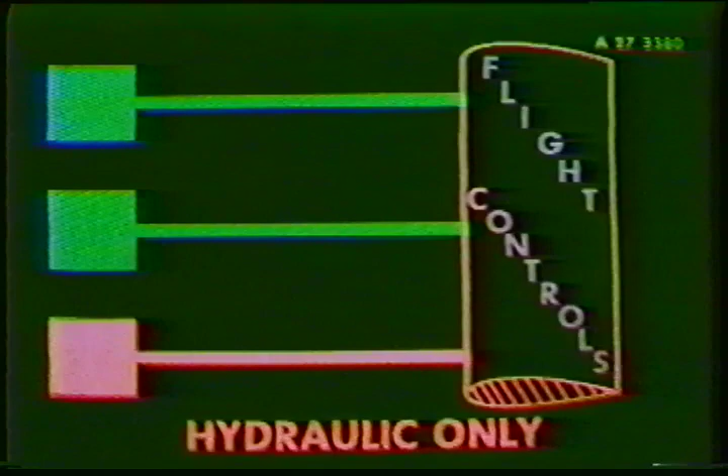The primary controls for roll are 2 all-speed ailerons, 2 low-speed ailerons, and 6 roll spoilers. For yaw control, a single rudder surface; 2 elevator surfaces and a trimmable horizontal stabilizer are provided for pitch control.

There are high lift devices on each wing. They consist of 2 trailing edge flap sections, 1 Kruger flap, and a notch flap at the wing root. Furthermore, to improve the aerodynamic characteristics, the all-speed ailerons deflect downwards when the flaps are moved to 8 degrees.

The lift dumping devices on the upper surface of each wing consist of 2 inner speed brake panels and 2 outer speed brake panels. In flight, these same panels are used together as speed brakes. On the ground, the speed brakes and the roll spoilers are used simultaneously as ground spoilers.

The flight controls are hydraulically actuated using the 3 hydraulic systems, blue, green, and yellow. They are completely independent, so that the loss of one hydraulic system does not affect the other 2, nor the safety of the flight.

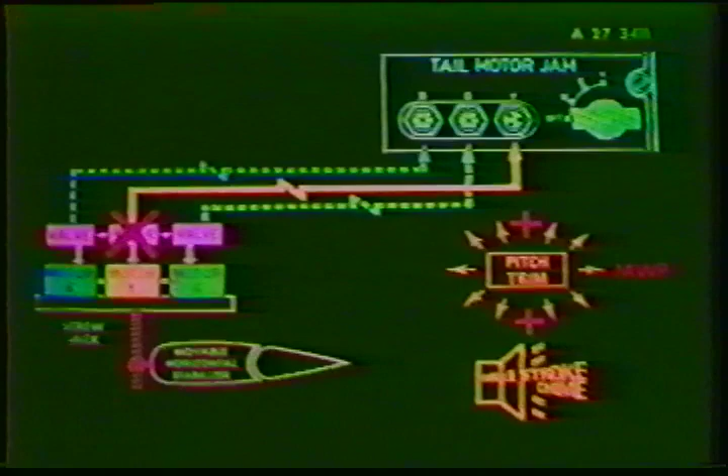The horizontal stabilizer is actuated by 3 hydraulic motors which operate simultaneously. Each motor is supplied by a different hydraulic system. The pilot valve of each hydraulic motor is fitted with a jam detector.

Flap actuation is achieved by a motor block that incorporates 2 hydraulic motors which operate simultaneously. Each of them is supplied by a different system. Slat actuation is achieved by a motor block of the same type as the flaps. The flaps and slats on each wing are fitted with asymmetry detectors.

The slat and flap motors are supplied from each system through a priority valve. This valve cuts off their supply when the corresponding system pressure drops below 1885 psi. This maintains the primary flight control supply.

In addition to the slats, the A300 is fitted with Kruger flaps and notch flaps. Each of these flaps is operated by a single actuator. The slat and flap motors, as well as the Kruger and notch flap actuators, are supplied through a priority valve. This valve, like the slats and flaps, cuts off their supply when the corresponding system pressure drops below 1885 psi. This maintains the primary control supply.

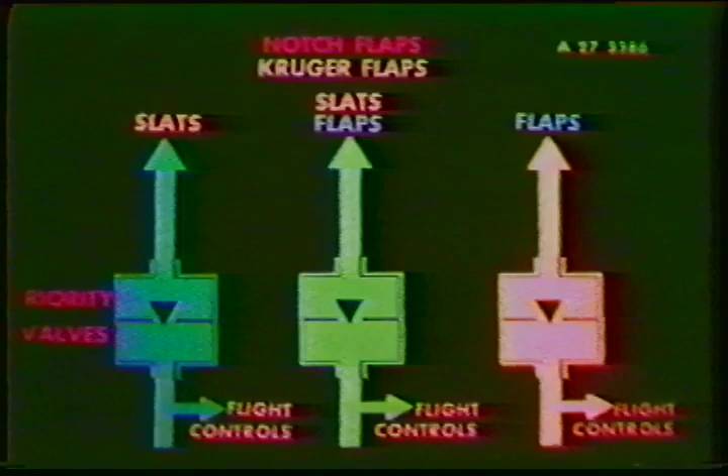An electro valve permits hydraulic fluid under pressure to flow to the primary controls and speed brakes. This valve is open when the solenoid is not electrically supplied. Each one of these electro valves is controlled by means of a selector on the servo control panel, located on the center overhead panel.

When the selector is positioned to on, the corresponding electro valve solenoid is de-energized and the valve is opened. With the selector off, the electro valve solenoid closes the valve. The test position is used by maintenance personnel only, and this is important, only on the ground.

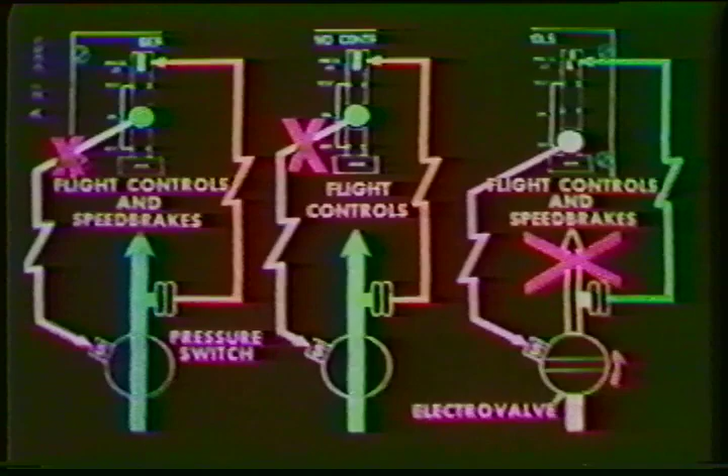The test function is not inhibited in flight. When the selector is set to this position, it has the same result as if it were set to off. The associated electro solenoid would be powered and closes. A mechanical lock makes it impossible to set more than 1 of these selectors out of the on position at the same time.

There is a pressure low magnetic indicator that displays the pressure in each system downstream of the electro valve. This magnetic indicator has two positions. Inline indicates normal pressure, while amber indicates a pressure lower than 1450 psi.

In the event of an individual servo control valve jam in the ailerons, rudder, or elevator, the jam amber warning light comes on, and the servos light illuminates on the master warning panel, accompanied by a single-stroke chime.

The jam and servos warning lights go out when the selector related to the corresponding system is set to off. As we have already seen, the electro valve closes and the corresponding flight controls are not supplied by the respective hydraulic system. The pressure low magnetic indicator turns amber.

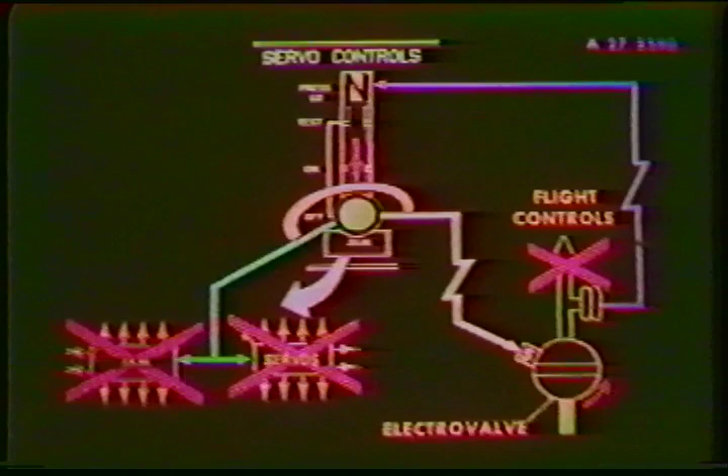Now let's go into the primary flight controls with a little more detail, starting with roll control. Roll control is provided by two identical coupled linkages and cable paths from the control wheel to the corresponding wing. The captain's yoke controls the left wing surfaces, and the first officer's yoke controls the right wing surfaces.

Under normal circumstances, the yokes are coupled by a spring strut, so both move simultaneously when either yoke is rolled. Rods and cables position a cable quadrant at the differential unit. The differential unit turns a shaft.

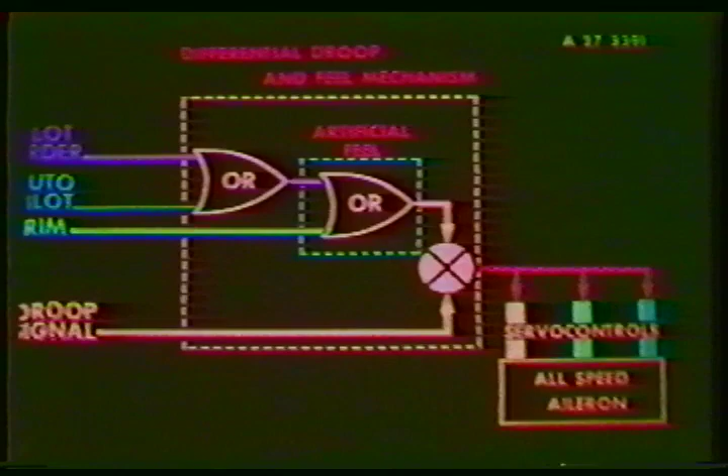Three servo valves are connected to a shaft and are each operated by a different hydraulic system. The shaft positions the valves to cause hydraulic pressure to move all-speed ailerons up or down. The differential unit also receives inputs from the pilot, autopilot, and trim control. Included in the differential unit is a spring assembly, which provides the artificial feel for roll control.

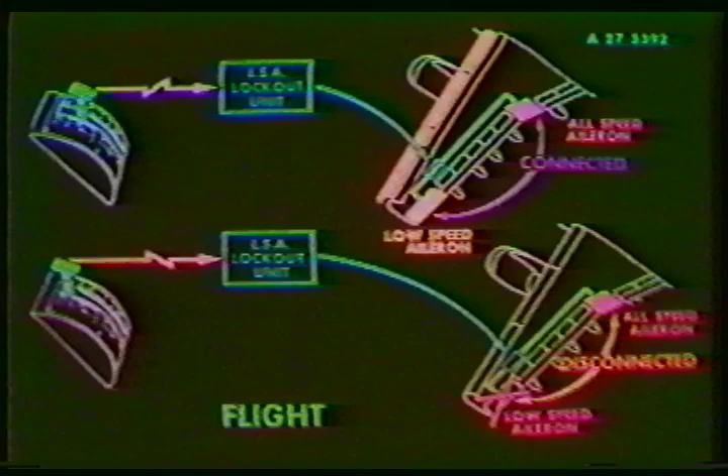When the aircraft is on the ground or in flight with the slat flap lever out of the retract position, the low-speed ailerons are connected to the all-speed ailerons by cables. So, if the all-speed ailerons are moving, then through an unlocking jack screw, the low-speed ailerons on each wing also move. When the slat flap lever is in the retract position and in flight, the jack screw, controlled by a computer, locks the low-speed ailerons to prevent that surface from moving.

Controls and indicators of the low-speed aileron connecting units are grouped on the low-speed ailerons panel located on the overhead. When the magnetic indicator shows inline, the low-speed ailerons are connected. When cross-line, they are disconnected. In the event of a discrepancy between one or both connecting units and/or the slat flap control lever position, the low-speed aileron light will illuminate. It is accompanied by a configuration light on the master warning panel and a continuous horn.

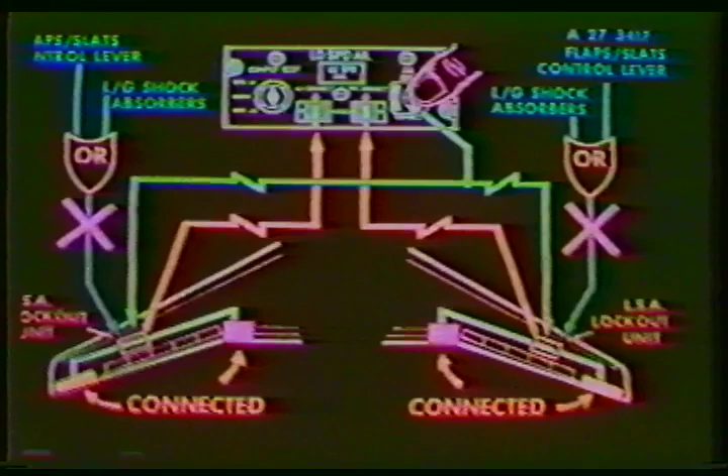A switch, which is held in its auto position by a guard, can be used to override the automatic controls to either disconnect or connect the low-speed ailerons by the use of a jack screw. The computer test is for ground test only. To increase the aerodynamic efficiency of the wing at low speeds, a droop signal from the flap position causes the all-speed aileron to deflect to a maximum of 10 degrees down. This occurs when the flaps are moved to 8 degrees.

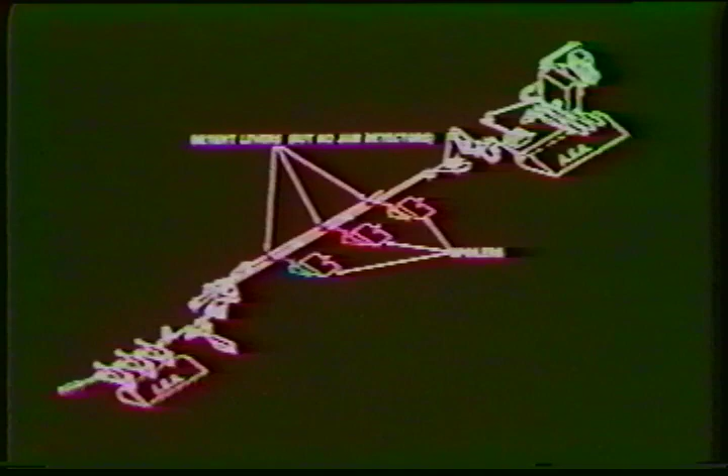The all-speed aileron linkage controls the position of the roll spoilers as well as the low-speed aileron. A full-stroke unit provides the transmission of the commands from the all-speed ailerons to the low-speed ailerons and roll spoilers. However, when the flaps are down, this same unit prevents the droop signal for the all-speed aileron from being transmitted to the low-speed ailerons. Spring units bring the spoilers or low-speed ailerons back to a neutral position in case of a failure of the control linkage.

Each of the three roll spoilers is actuated by a single hydraulic system, yellow, green, or blue. Normally, the servos work simultaneously as a function of the commands coming from the all-speed ailerons or the ground spoiler control. The roll spoilers are actuated as soon as the all-speed aileron deflection angle exceeds 5 degrees. There are no jam detectors associated with the roll spoilers. Therefore, no jam warning lights illuminate with this malfunction.

The roll spoilers' position is shown on the surface position scales of the flight control position indicator. The reading corresponds only to the outer and middle spoilers. The all-speed aileron position is directly read. The low-speed aileron position may be read on the same scale by depressing the low-speed aileron push button. A blue low-speed light comes on, indicating that the scale is showing low-speed ailerons.

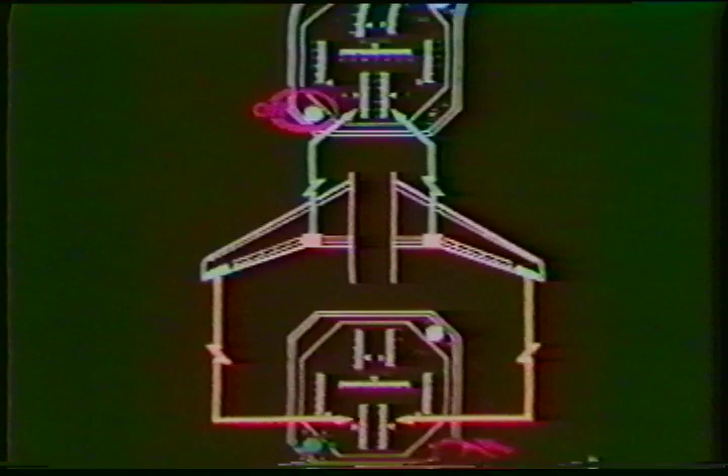We'll now discuss the roll jam. First, if an individual servo package jams, say on the all-speed aileron, the other two units will cause the ailerons to move. The movement causes a microswitch to complete the circuit in the malfunctioning unit and illuminates a jam light in the cockpit, along with a single-stroke chime, and a servo light on the master warning panel illuminates.

If a jam occurs in the first officer's cable path, his yoke and cables will not move. Therefore, only the control surfaces on the left wing will move. The captain will need to apply a 34 to 90-pound force to override this jam. It's reasonable to assume there will be a reduction in the aircraft's roll rate response. If the autopilot were connected, this jam would cause an autopilot disconnect.

On the other hand, if the jam were located in the captain's control path, the first officer will have to exert enough force, 34 to 90-pound force, to override the jam. Again, the roll response would be reduced because the right wing's control surfaces are the only ones moving. The autopilot would disconnect with this jam.

The autopilot is attached to the left aileron differential unit. The autopilot, when connected, flies the controls on the left wing through the differential unit. The right wing control surfaces move through the spring strut located between the yokes. As both yokes move, all appropriate controls move on both wings.

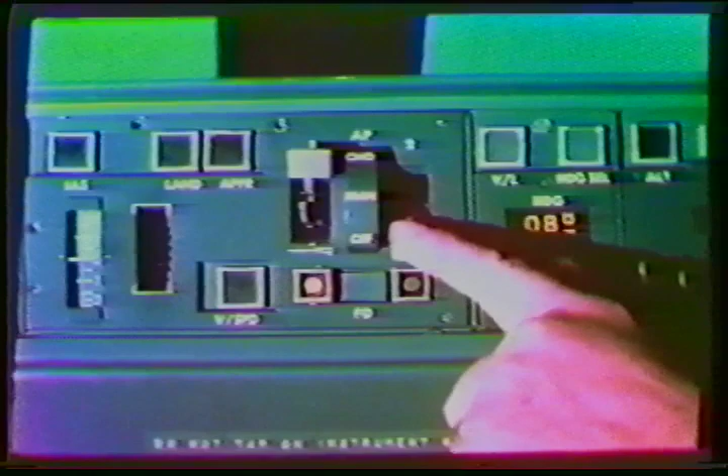When the autopilot is engaged, two control wheel steering sensors allow changes of roll attitude by action on a control wheel, known as control wheel steering function.

The discussion continues with pitch control. Pitch control consists of two control channels running along each side of the fuselage. They are connected to the control columns by a forward override mechanism. They are also connected to the elevator system by an aft override mechanism and a solenoid locking device.

When the yoke is moved back and forth, the inputs from the rods and cables to the cable quadrant and linkages to the individual actuators position valves to port hydraulic fluid from the hydraulic systems under pressure to move the elevator.

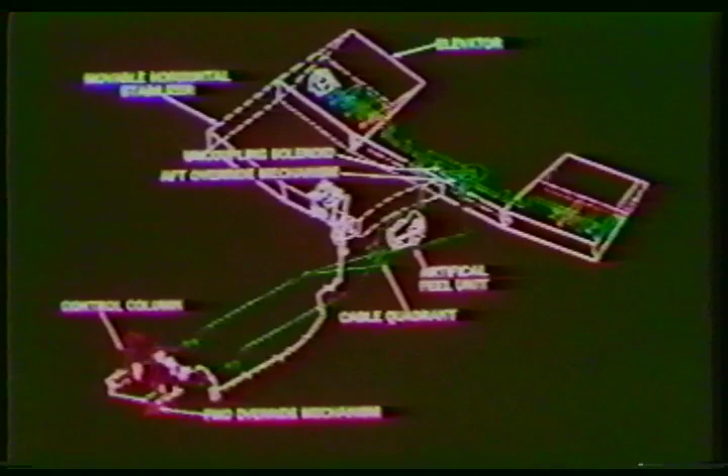Under normal operating condition, the coupling solenoid is uncoupled below 195 knots. The elevators, of course, move together because both cable quadrants are moving. At 195 knots or more, the solenoid locking device is engaged, and when one elevator moves, the other one moves also. This occurs because of the linkage between them.

Now, if a cable path jam occurs between the yoke and the cable quadrant, the particular path will not move. However, the free yoke will move and position the cable quadrant to move the elevator. This requires a 112-pound force to override the jam system. With a single-channel operation, it is not possible to get full elevator travel. However, surface movement is more than adequate for pitch control. The autopilot will disconnect with either a captain's or a first officer's control path jam.

Now, let's talk about an individual elevator jam. If the right elevator were jammed below 195 knots, the solenoid locking device is uncoupled, permitting the unjammed side to control pitch with either one or both columns. A force of 112 pounds is required to override this aft jam. The autopilot will disconnect with this jam.

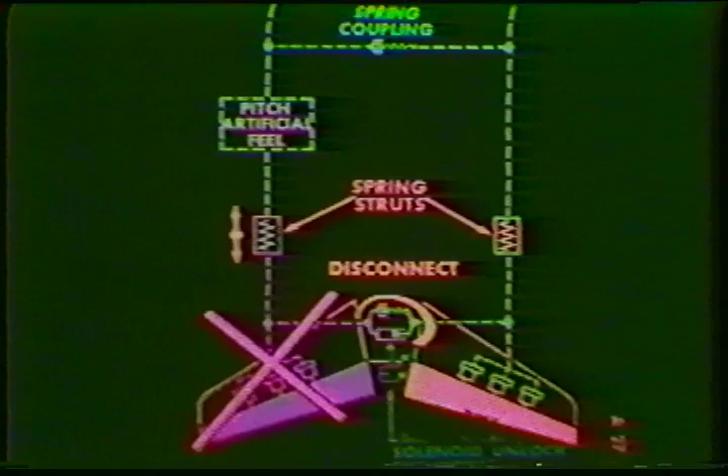Above 195 knots, the solenoid locking device is engaged and the good elevator is coupled to the jammed one. In this case, the columns will move against spring struts, but the elevator will not move. Pitch control is only accomplished with the stabilizer trim. The autopilot will disengage with this jam.

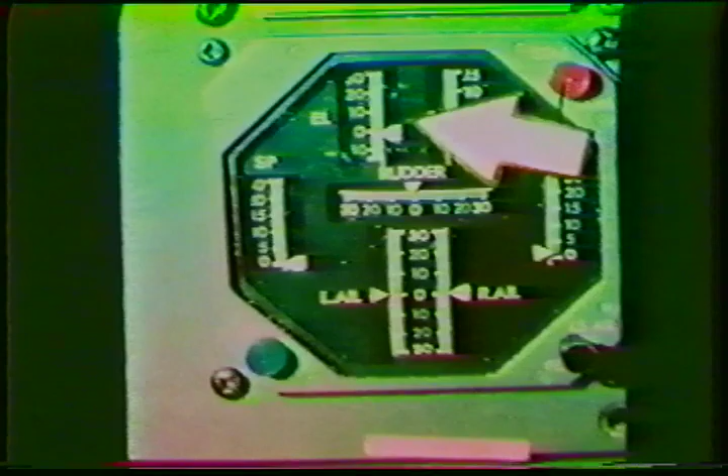Each elevator surface is actuated by 3 servo controls from 3 hydraulic systems: yellow, green, and blue. The servo controls are fitted with jam detectors, similar to the ailerons, which will illuminate the jam light on the servo control panel, accompanied by a single-stroke chime. The elevator surface position is shown on the EL scale of the flight control position indicator. This position information is only picked off from the right elevator surface.

Artificial feel units, known as pitch feel 1 and pitch feel 2, work in parallel to adjust the elevator forces according to speed and stabilizer position. The pitch feel 1 system receives speed information from ADC 1, and its feel actuator is supplied by the green hydraulic system. The pitch feel 2 system receives speed information from ADC 2, and its feel actuator is supplied by the yellow hydraulic system.

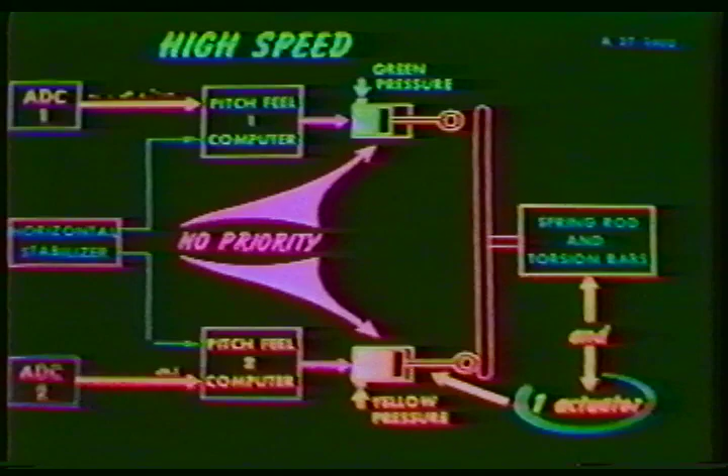Below 195 knots, the actuators are retracted and the artificial feel is only achieved by spring tension. Above 195 knots, the feel is provided by the actuator according to speed and stabilizer position. Pitch feel systems 1 and 2 work simultaneously, or independently if one system becomes inoperative. In the case of loss of both systems, both actuators are brought back to the low-speed configuration corresponding to below 195 knots.

Artificial feel controls and indicators are located on the pitch feel section of the overhead panel. Selection of each system is by a 2-position switch. With the selector positioned to on, the system is engaged. In off reset, the system is disengaged. A pitch feel amber warning light illuminates if there is a system 1 or 2 failure. This is accompanied by a pitch feel light on the master warning panel and a single-stroke chime.

An autopilot servo motor located in the stabilizer's right-hand side actuates the elevator control system. This servo motor has 2 actuators, one supplied by the green system and one by the yellow. When the autopilot is engaged, 2 control wheel steering sensors allow the pilot to change the pitch attitude by moving the control column. This is called control wheel steering or autopilot override. A detent unit allows the pilot to override the autopilot and limit the autopilot's authority in case of a runaway.

Now we'll discuss the stabilizer control. Trimming in the pitch axis is achieved by displacement of the trimmable horizontal stabilizer to bring it permanently in line with the elevator. The stabilizer is actuated by 3 hydraulic motors. These motors operate a single jack screw linked to the stabilizer.

The hydraulic motors may be controlled either mechanically or electrically. The mechanical control is achieved by the trim wheels via cable linkages which move the 3 hydraulic motors' pilot valves. The electrical control is achieved by 2 identical systems, pitch trim 1 and pitch trim 2. A trim computer for each system sends the signals to an electrical motor. The electrical motor actuates the hydraulic motor's pilot valve's control through a torque limiter.

Engagement of each pitch trim system is achieved by means of the corresponding lever on the pitch trim panel. The lever is magnetically held in the 1 or 2 position. The corresponding system is engaged if the corresponding AC bus and the DC essential bus for pitch trim 1 or the DC normal bus for pitch trim 2 are supplied. It is also necessary that the corresponding ADC is available and the monitoring system of the corresponding computer is operative.

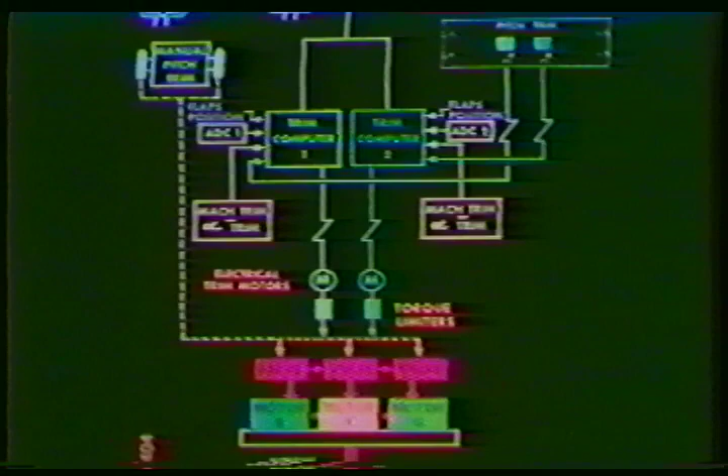The pitch trim computers receive flap position information. This information is used to vary the rate of trim speed. When both pitch trim systems are engaged, pitch trim 1 has priority and pitch trim 2 is in a standby and synchronized condition.

There are two trimming modes, the electric trim and the auto trim. The electrical trim is used when the autopilot is not engaged. This moves the horizontal stabilizer setting by the action of the trim rocking levers located on the control wheels.

The auto trim mode is achieved when the autopilot is engaged. The control wheel rocking levers are then inhibited for trim. The trim computers receive electrical signals from the autopilot. They control the horizontal stabilizer displacement until it is in line with the elevator. Thus, there is no jerk when the autopilot is disengaged.

As soon as a pitch trim is engaged, and depending on the mode used, that is electric trim or auto trim, the trim system also provides Mach trim and alpha trim functions. Mach trim system is provided to vary the stabilizer setting to maintain aircraft stability. As the center of lift moves aft on the wing, tuck under starts to occur. The Mach trim computer compensates for this by trimming the stabilizer to as much as 1 degree 26 seconds aircraft nose up.

Alpha trim protects the aircraft against flight effects at high angles of attack, high Mach number, and high altitudes. If the aircraft is banked sharply at high altitudes and speeds, the aircraft will tend to pitch up. Trim computers will sense this from information processed by the air data computer, Mach number, and trim. Trim input can be to a maximum of 1 degree aircraft nose down as required.

We have already seen that with both trim systems engaged, the pitch trim 1 has priority and ensures the horizontal stabilizer displacement. Any detection failure triggers pitch trim 1 disengagement and pitch trim 2 takes over. Any failure of one or both systems is indicated by illumination of the pitch trim light on the master warning panel, accompanied by a single stroke chime and normally by the corresponding pitch trim lever dropping to the off position.

All electric trim modes may be overridden by action on the trim wheels. Above a certain threshold, torque limiters send a signal to the computers, leading to both systems disengagement. Both systems may also be disengaged by setting both pitch trim levers to off.

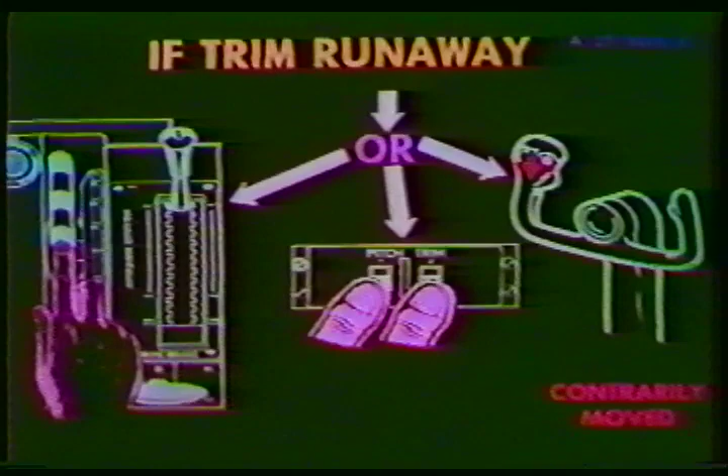The position of the stabilizer is shown on the flight control position indicator. On the ground, if the horizontal stabilizer is not in the takeoff configuration, the stabilizer trim warning light illuminates on the flight control position indicator. If takeoff N1 is simulated, that's by pushing the takeoff configuration button, or throttles are moved above 97% N1, the config warning light illuminates on the master warning panel and the intermittent horn sounds.

In the event one hydraulic motor pilot valve jams, the corresponding magnetic annunciator turns white on the test and monitoring panel. At the same time, the pitch trim light illuminates on the master warning panel and a single stroke chime sounds. The stabilizer trim rate is reduced.

The yaw axes will be discussed now. The two sets of rudder pedals in the cockpit are connected together. A single cable path runs along the fuselage to mechanically connect the pedals to the 3 servo controls through a mechanical bell crank and a variable lever arm unit. The rudder position is shown on the flight control position indicator.

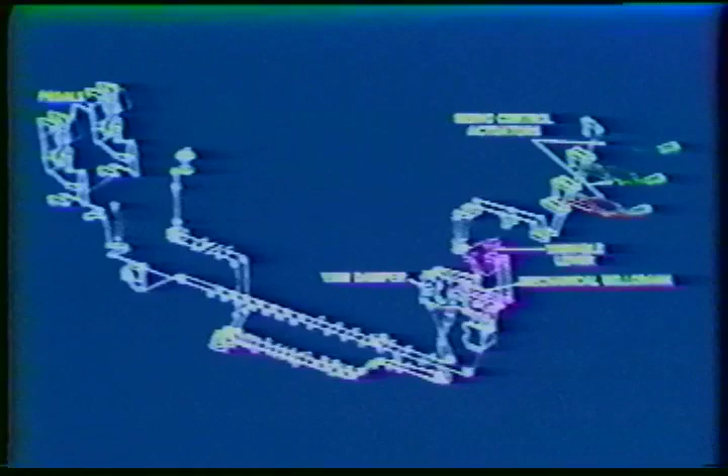The variable lever arm unit is a hydromechanical assembly. Its purpose is to progressively reduce the rudder travel according to the speed. For a given rudder pedal's displacement, the maximum rudder travel, which is 30 degrees up to 165 knots, is progressively reduced to a maximum of 5 degrees at 405 knots.

The variable lever arm positions 3 servo actuators to cause hydraulic fluid under pressure to move the rudder. These servos are fitted with jam detectors similar to the ailerons and elevators. In this event, a jam light illuminates on the servo's control panel located on the overhead, and a single-stroke chime sounds. The servo's light on the master warning panel also illuminates.

The rudder travel system includes two identical and independent systems operating in parallel, rudder travel 1 and rudder travel 2. Each system includes a hydraulic actuator which modifies the variable lever arm movement. Each actuator is slaved in position by one computer which receives speed information from the corresponding ADC.

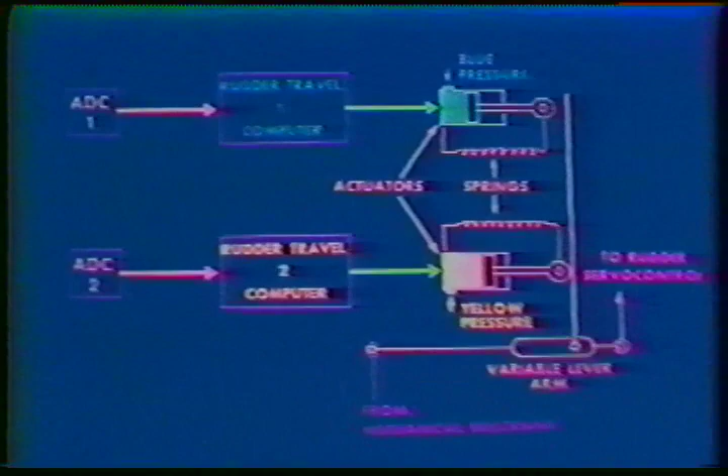The rudder travel 1 actuator is supplied by the blue system. It is slaved in position according to speed information from ADC 1. The rudder travel 2 actuator is supplied by the yellow system. It is slaved in position according to speed information from ADC 2. These actuators are supplied through electro valves which are controlled by the selectors on the servo controls panel.

At speeds below 165 knots, the actuators are shortened. The variable lever arm movement is not modified, so the rudder travel is not reduced. At speeds above 165 knots, the actuator lengthening is modulated according to the speed. The variable lever arm movement is modified by displacing the hinge point. So for a given rudder pedal's displacement, the rudder travel is reduced.

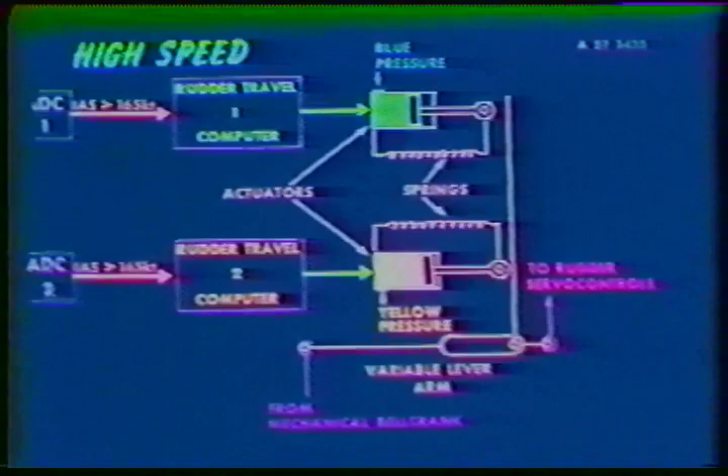When the rudder travel systems 1 and 2 are engaged, neither system has priority. Both actuators work simultaneously, but only the system which has the greater length assumes the function. The other actuator is synchronized. In the event of failure of one or both systems, the corresponding actuator is brought back to low-speed configuration by a spring strut.

Each system engagement is achieved by a two-position switch on the rudder travel panel. With the switch positioned to on, the system is engaged. At off reset, it is disengaged. An amber rudder travel warning light illuminates for all detected failures within the corresponding system. It is accompanied by the illumination of a rudder travel light on the master warning panel and by a single-stroke chime. The rudder travel warning light can also be used to test the corresponding system.

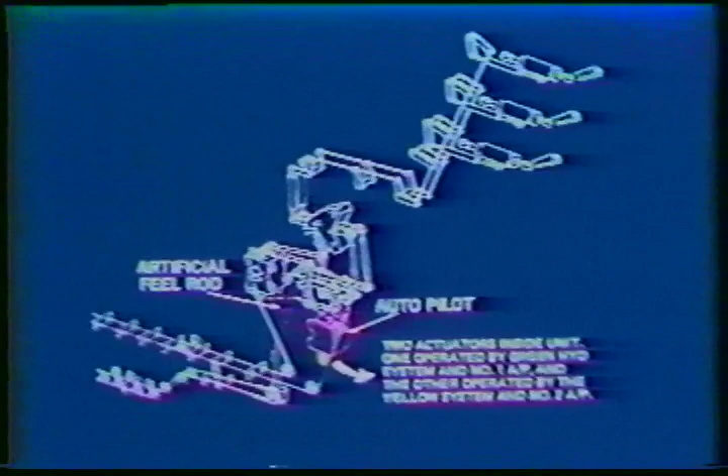Trim control is mechanically achieved by direct action on the artificial feel, which consists of a spring strut. Thus, artificial feel is independent of the speed. The autopilot servo motor fitted downstream of the artificial feel is linked to the mechanical bell crank via a clutch system, allowing manual override. The servo motor includes two hydraulic actuators, one for each autopilot. One of the actuators is supplied by the green system and the other by the yellow system through electro valves controlled by the selectors on the servo control panel.

A yaw damper servo motor is also linked to the mechanical bell crank. The yaw damper system provides lateral oscillations dampening and turn coordination in manual flight with the flaps extended, and a beginning of automatic rudder kick in case of an engine failure in automatic flight with the flaps extended. This is covered in the AFCS section.

The servo motor includes two hydraulic actuators, each one operated by a different system. The yaw damper 1 actuator is supplied by the blue system and yaw damper 2 by the yellow system. The actuators are also supplied through the electro valves controlled by the selectors on the servo control panel. The engagement of each system is achieved by means of the corresponding lever on the yaw damper panel.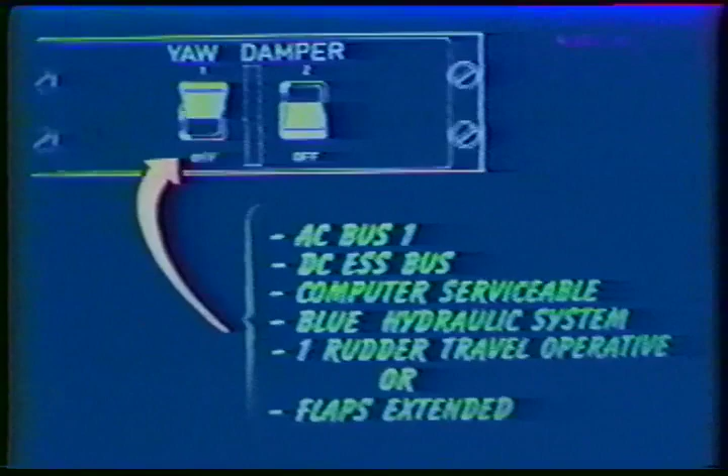The lever is mechanically held in the 1 or 2 position, and the corresponding system engagement is possible if the AC bus 1 and DC essential buses are supplied for yaw damper 1, and AC bus 2 and DC normal buses are supplied for yaw damper 2. The corresponding computer must be serviceable. The hydraulic supply is available, and one rudder travel system is operating.

When both yaw damper systems are engaged, yaw damper 1 has priority and yaw damper 2 is synchronized. Failure of one or both systems is signaled by the corresponding lever dropping to off and the illumination of a yaw damper light on the master warning panel, accompanied by a single-stroke chime.

3 additional notes should be brought to your attention. One, rudder trim and autopilot inputs will move the rudder pedals. Two, yaw damper does not move the pedals. And the third one, when stall warnings are energized, the yaw damper inputs to the rudder for turn coordination are inhibited. This completes the primary controls.

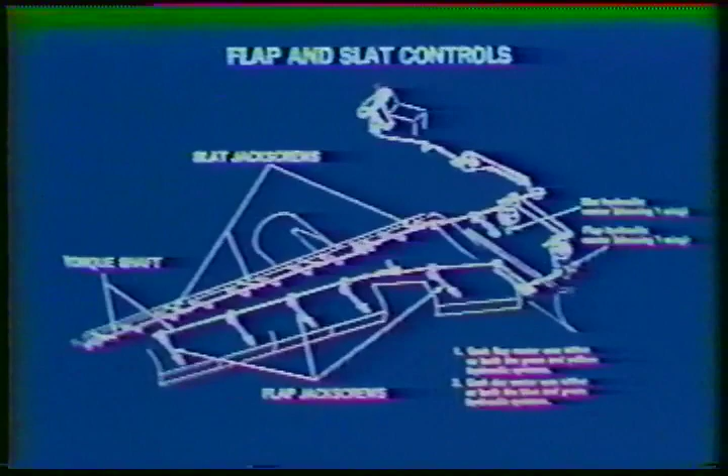The secondary controls consist of high lift devices and lift dumping devices or spoilers. When the slat flap handle is moved in the cockpit, through rods and cables, inputs are made to 4 hydraulic motors, 2 for the flaps and 2 for the slat extension and retraction. These hydraulic motors move the trailing edge or leading edge devices by the use of 2 jack screws in each wing.

The trailing edge flaps consist of 3 sections per wing. They are the double slotted type and move rearwards. Each flap section is driven by 2 jack screws and moves along 2 tracks.

An actuating unit consisting of 2 hydraulic motors interconnected by a differential gear operates the flaps through a torque shaft assembly and jack screws. Each torque shaft assembly also drives an aileron droop signal unit. This unit allows the all-speed ailerons to deflect 10 degrees down when the flaps are extended.

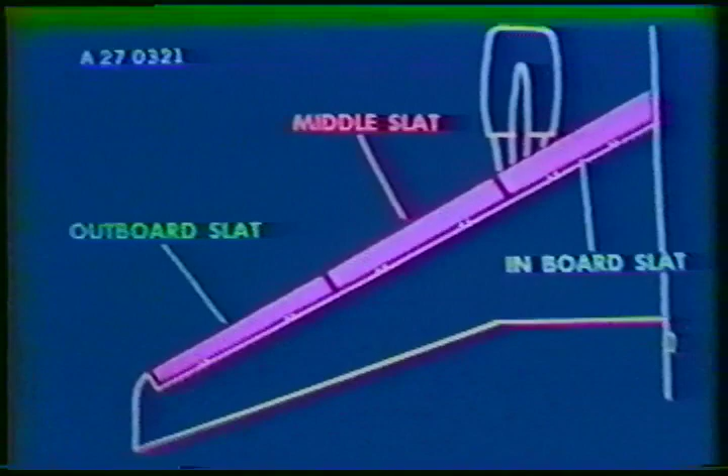The leading edge slats, 3 sections per wing, move forward to reach their extended position. Like the flaps, for each wing, the 2 hydraulic motors interconnected by differential gear drive the slats through a torque shaft assembly and a jack screw.

A Kruger flap and a notch flap are provided on each wing to improve the efficiency of the slats. They can be in 2 positions only, retracted or extended. Each of the Kruger and notch flaps is moved by a hydraulic actuator. These actuators are supplied through the green hydraulic system, through the same hydromechanical selector controlled by the input mechanism of the slat motors.

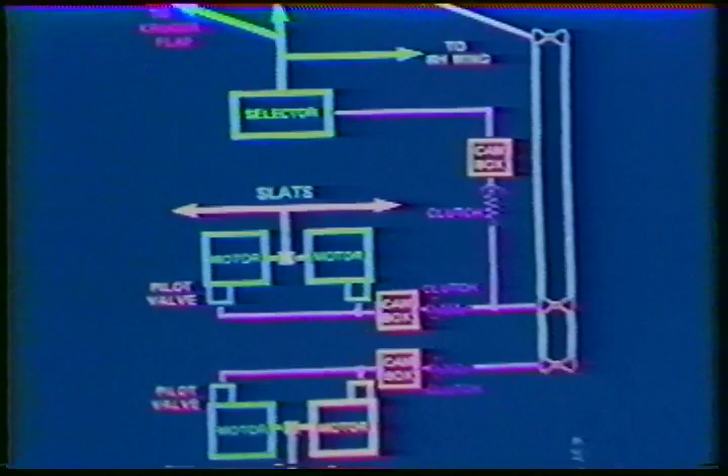The control system consists of a duplicated cable linkage which gives commands to the pilot valves of each motor and to the Kruger and notch flap control selector through a clutch. This selector is controlled upstream of the slat motor unit. For each actuating unit and the selector, a cam box is provided to comply with the requirements for the extension of the corresponding control surfaces.

Should a mechanical jamming occur between either the actuating unit and its clutch, the clutch disconnects and enables the opposite control surfaces to be used. Similarly, in the event of a jamming between the selector and its clutch, the slats and flaps will continue to operate. If the angle of attack exceeds 8.6 degrees, a solenoid will prevent the retraction of the slat handle beyond the 16-degree position until the angle of attack is reduced.

As already mentioned, the flaps and slats are driven by 2 hydraulic motors. The flap motors are supplied respectively by the green and yellow hydraulic systems, and the slat motors by the green and blue hydraulic systems. The 2 hydraulic motors are independent, but they drive a single output shaft through a differential gear. Each motor is fitted with a hydromechanical brake which operates in low pressure condition. In normal operation, it is kept released by a hydraulic power passing through 2 series-connected electro valves.

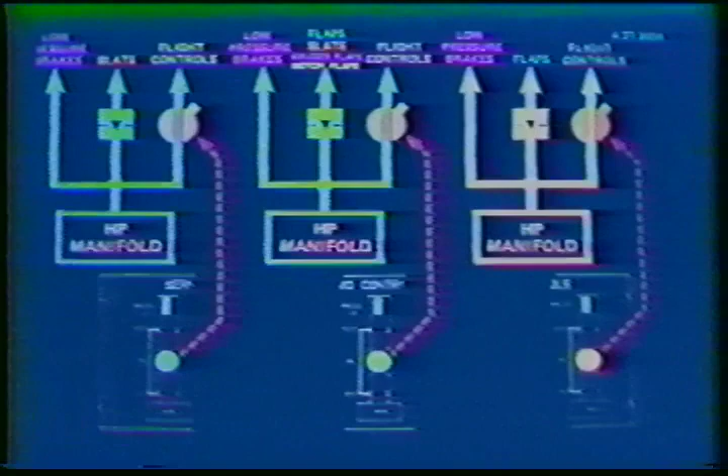The flap motors are supplied directly from the high-pressure manifold through priority valves. The supply to the low-pressure brake is upstream of these valves. Similarly, the slat motors are supplied directly from the high-pressure manifolds through the priority valves. The supply to the low-pressure brake is upstream of these valves. Notice that the hydraulic supply to the slat and flap motors and the low-pressure brakes is not through the electro valves controlled by the selectors on the servo control panel. The Kruger and notch flap actuators, which use the green hydraulic system only, are also supplied directly from the high-pressure manifold through a priority valve.

A jammed condition of a pilot valve in any slat or flap motor is indicated in the cockpit by a magnetic annunciator which turns white on the second officer's panel. At the same time, an electrical signal causes the closure of both electro valves of the brake of the corresponding motor. Cutting off the hydraulic supply puts the brakes on and locks the motor output. The movement is then provided by the other motor, but at a reduced rate.

The position of the slats and flaps and the Kruger and notch flap configuration are displayed on the slats and flaps position indicator. The orange index on the flap scale displays the actual position of the control lever. It also indicates the limit speeds. The positions of the control surfaces are shown by the white stripes which move on the flaps and slats scales.

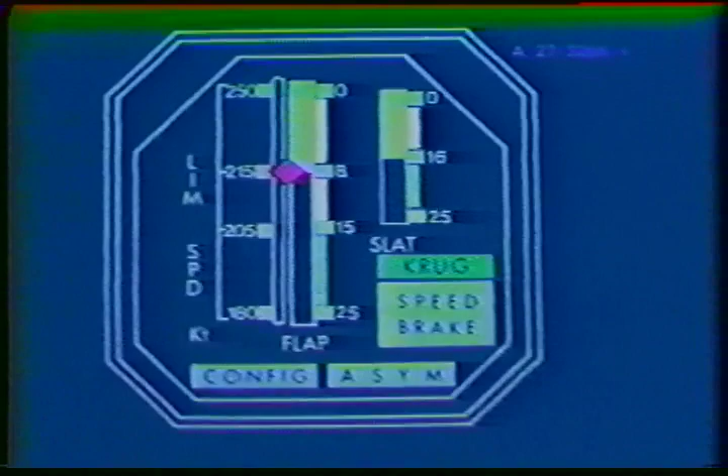A configuration light on the flight control position indicator illuminates on the ground only if the slats and flaps are not in a takeoff configuration. If takeoff thrust is used or simulated, for example, N1 greater than or equal to 97%, the configuration light illuminates on the master warning panel and an intermittent horn sounds.

A Kruger light on the flight control position indicator gives the configuration of the Kruger and notch flaps. It is extinguished when the four control surfaces are retracted. The blue light flashes while in transit for any or all four control surfaces. The blue light is on steady when four control surfaces have reached their fully extended position.

If 10 seconds after the movement signal, one or two Kruger and notch flaps are not in agreement with the position of the slat flap control lever, the Kruger light flashes continuously. The configuration light illuminates on the master warning panel, accompanied by a continuous horn. Note that in the event of a loss of the green system, these warnings will be activated at the slat extension.

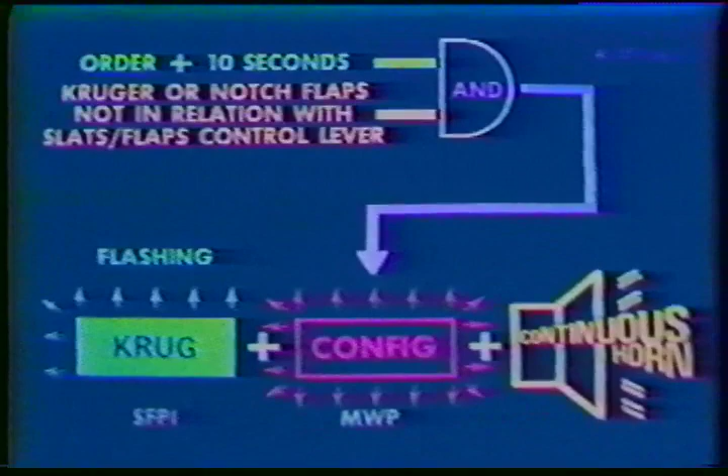Two independent asymmetry computers receive slats or flaps position information from the detectors installed at the end of each torque shaft assembly. These computers compare the position of each shaft end and then allow the detection of any asymmetrical movement of the left and right wing control surfaces. This occurs when a 1-degree difference is detected between the left and the right wing.

The computers cause the closure of both low-pressure brake electrovalves in each of the motors. The brakes lock the motor's output, which stops the control surfaces immediately. Only one monitoring channel is sufficient to provide this function.

When an asymmetry has been detected by at least one of the computers, and if both brakes have operated, the asymmetry light illuminates on the slat flap position indicator together with a configuration light on the master warning panel. A continuous horn sounds. The position of the involved control surface is indicated on the flight control position indicator.

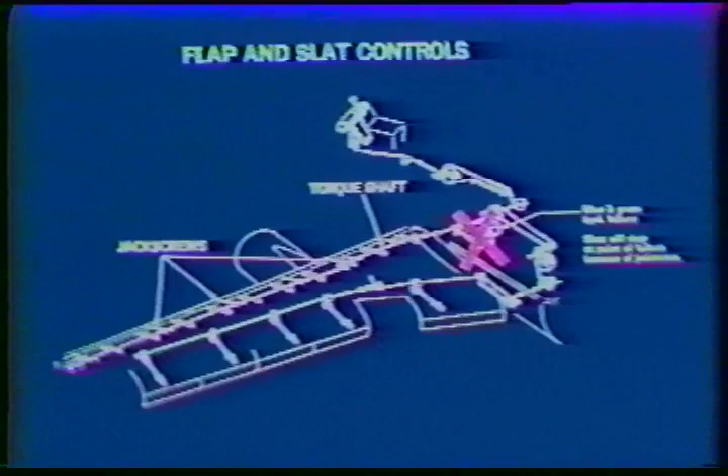Also, in the event of a complete hydraulic failure to the slats or flaps, for example, open lines, the flaps or slats will stop where the failure occurred. Either one stops because they extend and retract by a jack screw arrangement, and aerodynamic forces would not be able to override this jack screw.

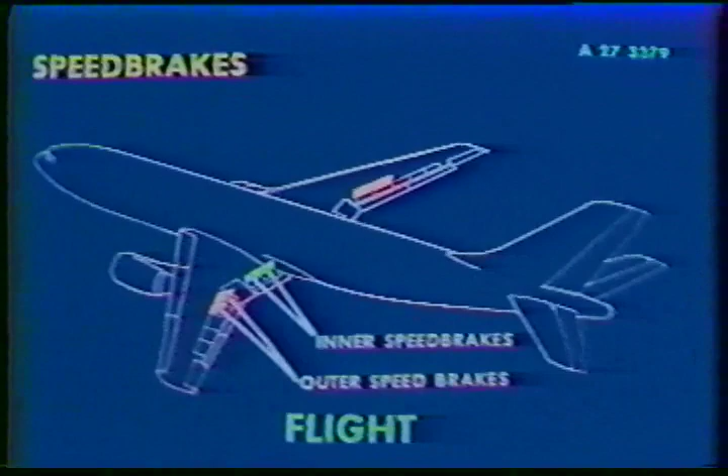Let's study the speed brakes and the ground spoilers now. Speed brakes are provided for in-flight, and ground spoilers are used on the ground. In each wing, the speed brake function is provided by two inner speed brakes and two outer speed brakes. The ground spoiler function is provided by four speed brakes plus three roll spoilers on each wing.

The speed brake handle, which is located on the center pedestal, is moved between the retract and full position to operate the speed brakes. A linkage transmits the movement of the handle to the pilot valves of the speed brake servo controls. Each speed brake is actuated by a single servo control as opposed to all the other control surfaces. The two servos for the four speed brake panels on each wing are supplied by the blue and the yellow hydraulic systems.

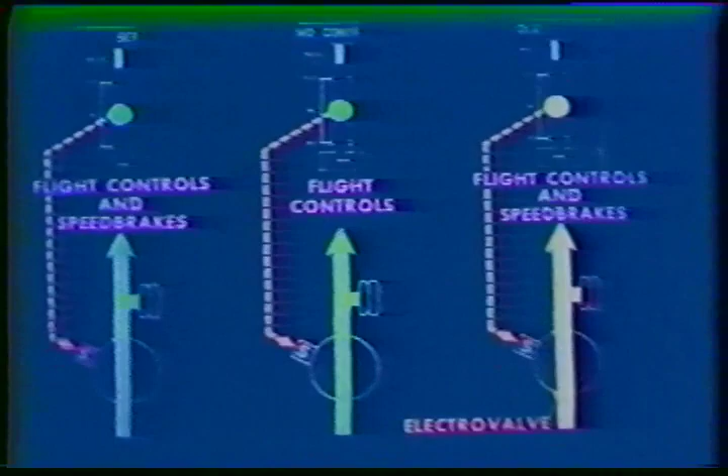The speed brake servo controls are supplied through electrovalves controlled by selectors on the servo control panel. Just a reminder that the speed brakes are not fitted with jam detectors. A speed brake light located on the flight control position indicator gives the speed brake configuration. It is off if the speed brakes are retracted. It illuminates amber as soon as the speed brakes are extended.

On the ground, if the speed brakes are extended and the takeoff thrust is applied or simulated, for example, N1 greater than or equal to 97%, the config light illuminates on the master warning panel accompanied by the intermittent horn. The maximum speed brake deflection angles in flight are 35 degrees for the outer speed brakes and 25 degrees for the inner speed brakes.

The ground spoiler function is next. The inner speed brakes extend to 50 degrees and the outer speed brakes extend to 35 degrees. The roll spoilers extend to 50 degrees. This occurs either at landing or in the event of an aborted takeoff.

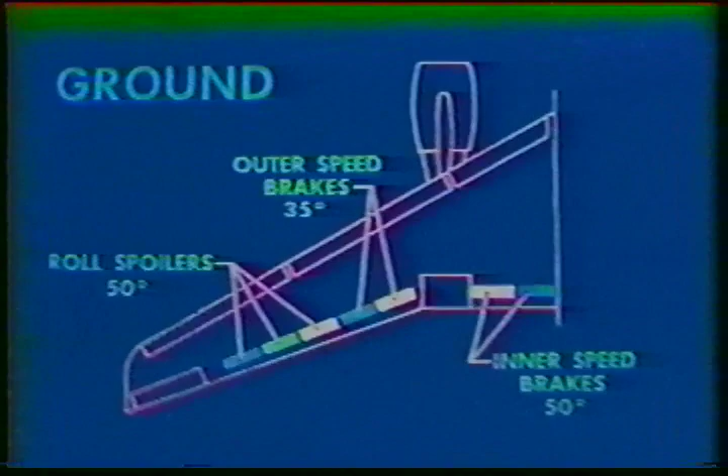Ground spoilers will extend automatically if the following conditions are satisfied: the function has been armed, both throttles are at idle, and the aircraft is in the ground configuration. Ground spoilers are normally armed by pulling the speed brake control lever upwards when at the retracted position. Arming is also accomplished when either reverse lever is unlocked.

The ground condition is achieved using the speed information coming from the tach generators on the rear, right, and left wheels of each main landing gear. The logic is such that the ground condition is achieved when landing if the speed of at least one wheel of either main landing gear is greater than 50 knots. If a takeoff is aborted beyond 50 knots and weight is still on the main gear, the spoilers will extend as reverse is applied.

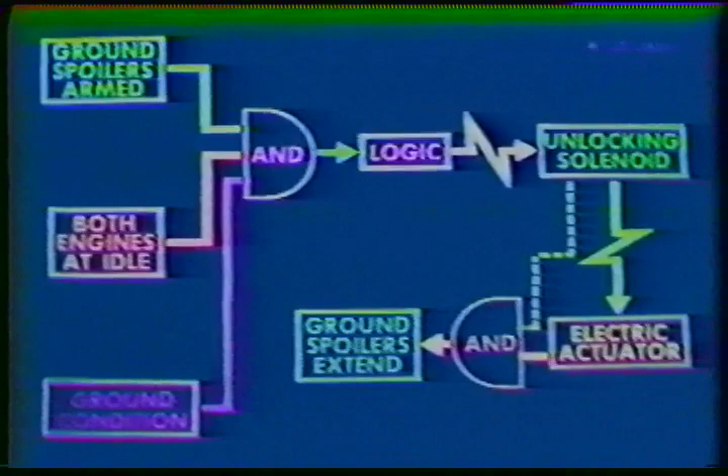The electronic logic supplies an unlocking solenoid and an electric actuator. The solenoid releases the control handle, and the handle is driven by the electric actuator to the extend position. The movement of the handle is transmitted to the mechanical linkage, causing the ground spoilers to extend. Extension of the ground spoilers is carried out in 2 phases. When the handle moves from retract to full, the normal extension of the speed brakes is controlled by the electric actuators. From full to ground spoiler, the complete travel of the linkage causes the opening of a hydromechanical selector.

This hydromechanical selector is supplied by the yellow hydraulic system and allows 2 actuators per wing, one for the speed brakes and one for the roll spoilers, to extend on the ground for full deployment of all 7 spoiler panels on each wing. These actuators cause the extension of the inner speed brakes from 25 to 50 degrees and the roll spoilers directly from 0 to 50 degrees.

Ground spoiler extension is indicated on the slat flap position indicator by the illumination of the speed brake light, and on the flight control position indicator by the indices on the spoiler scales. Please look at the diagram and note that the spoiler indication does not take into consideration the position of the inner roll spoiler, which uses the yellow hydraulic system. This completes the flight control presentation.

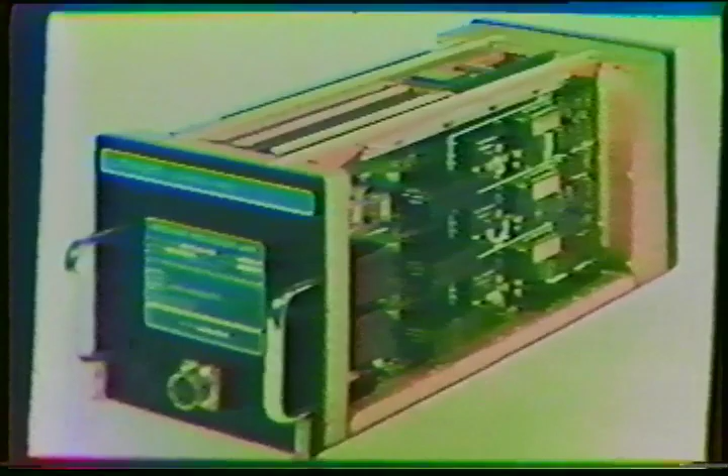This program is intended to review procedures relating to Omega system operations. Procedures such as initialization and waypoint entry will not be discussed since they are now routine. During system operation, certain malfunctions and/or failures may occur. The LTN-211's built-in test system monitors and tests approximately 10 functions. The probability of detecting a failure within the system is greater than 99%.

Whenever the display selector switch is set to DTK STS, the right numerical display indicates action malfunction codes and the status of the system. The status indication consists of a 2-digit coded number in the least significant digits. The red warn annunciator illuminates when an Omega navigation system failure has been detected by the integrity monitoring function. A steady warn annunciator indicates a hard ONS failure. When this condition occurs, attempt system reinitialization. If it fails again, report malfunction to maintenance.

The logbook write-up should include the following: the Z time at which the malfunction occurred; the stations being used, indicated when the CDU display selector is set to STA; the wind and true airspeed readouts from the CDU; the malfunction code, as discussed later in this program; and finally, a brief description of the problem.

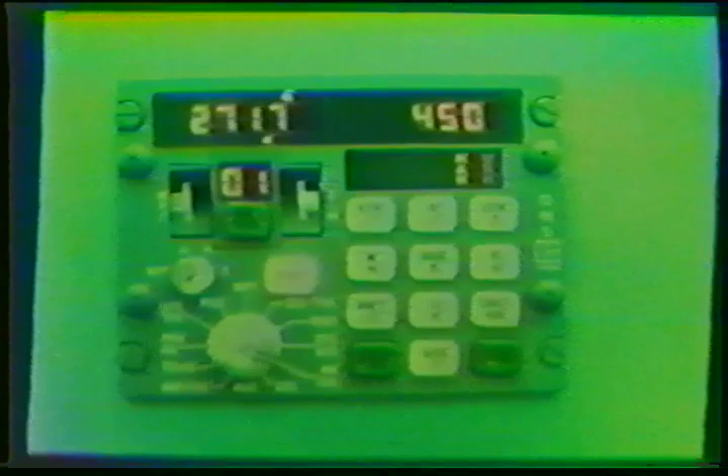When in the DR mode for an extended period of time, it may become necessary to manually update wind direction and/or velocity. The winds shown on the computerized flight plan may be used if, to this point, they were accurate. For a manual wind direction entry, set the display selector switch to wind, then press L. Then starting with the most significant digit, key in the direction and press ENT. For a manual velocity entry, press R. Then starting with the most significant digit, key in velocity and press ENT.

Note, wind entry requires the entry of both wind direction and wind speed. A manual entry of wind is only possible in the DR mode, and the system will automatically use the calculated value for wind when Omega navigation is resumed.

This aux function is used only in the DR mode to manually enter drift angle and ground speed. In flight, these parameters must be periodically updated to maintain accurate DR navigation. Here again, your computerized flight plan may be used as a data source. When Omega navigation is resumed, these values will be automatically updated based on received Omega data. Manual entry of drift angle and ground speed may be accomplished as follows.

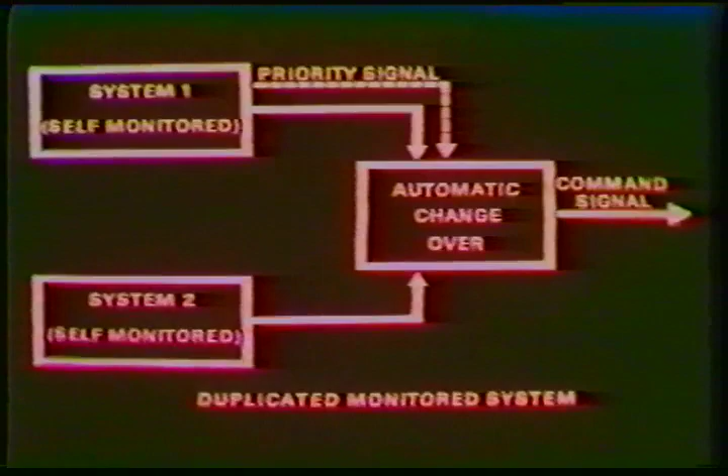The yaw damper uses 3 different input signals: the yaw gyro signal, the roll attitude signal, and the lateral accelerometers. The yaw rate signal controls the Dutch roll damping and damping of effects of turbulence mode. The roll attitude input controls the turn coordination mode.

With the autopilot engaged, the accelerometers counter the immediate effects of an engine failure. As a result, the lateral movement caused is detected and a continuous rudder correction is applied. In summary, the yaw damper operates in much the same manner on the A300 as on other aircraft Eastern operates. The yaw damper rudder deflection is limited to 10 degrees or less depending on aircraft speed.

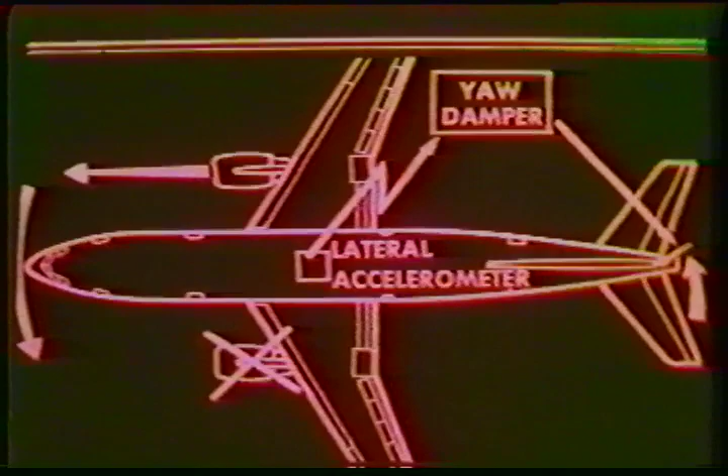Now, with the autopilot engaged and the flaps at 8 degrees or more, the accelerometers will provide short-term rudder deflection, while the long-term deflection for engine failure compensation is provided by the autopilot yaw channel and is limited only by the rudder travel system. The yaw damper engage switches are located on the overhead panel. There are 2 identical subsystems for redundancy in the event of one failing.

The pitch trim subsystem actuates the trimmable horizontal stabilizer. When the pilot activates the control wheel trim switches or rocker switches, he causes the electrical trim function to operate the horizontal stabilizer. With the autopilot engaged, the electrical trim function will automatically trim the horizontal stabilizer. This is a dual subsystem for redundancy.

The auto throttle subsystem moves the throttles in order to maintain the airspeed selected on the counter. The indices or bug in both airspeed indicators will also point to the same speed. The auto throttle system moves the throttle levers to acquire the selected speed. Its second purpose is the holding of selected N1 displayed on the N1 computer.

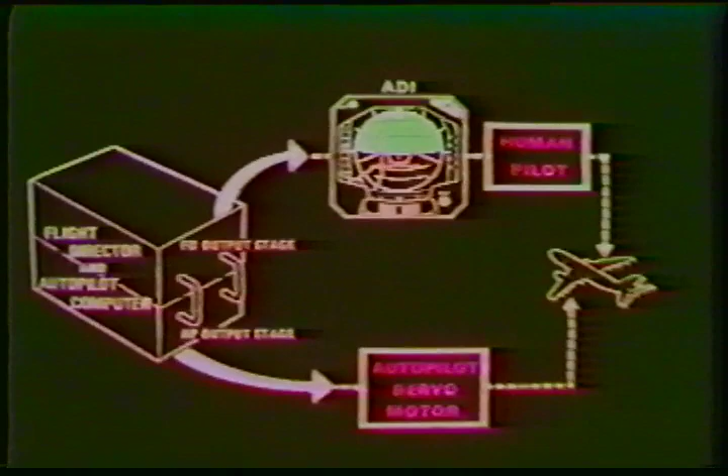The autopilot flight director subsystems use a common computer and employ the same electronic computation. The autopilot flight director is controlled from a common panel, and most of the time they operate in the same modes. We will therefore assume that the autopilot simply obeys the flight director commands as a human pilot responds to flight director command indications.

The Failure Performance Indicator, or FPI, indicates the mode and function engagement configuration. From left to right, the indications concerning the auto throttle, then lateral autopilot flight director modes. The lower part displays the approach and automatic landing annunciators.

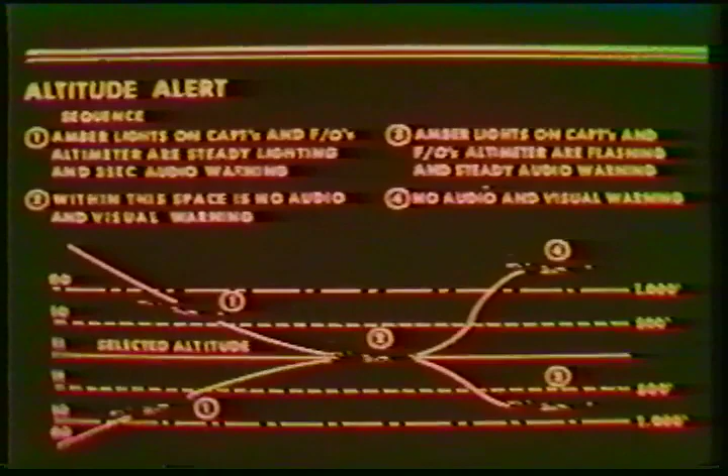The altitude alert system provides audio and visual warnings on approaching or leaving a pre-selected altitude. It operates independently of autopilot or flight director engagement modes. The system is operative when the landing gear is retracted or when the aircraft is on the ground.

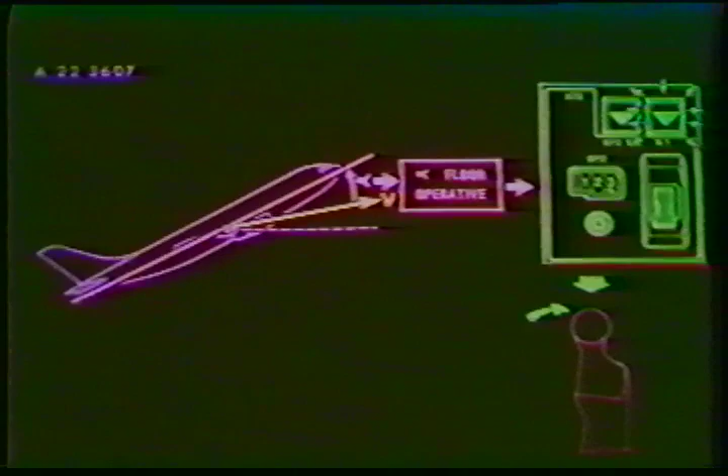The Speed Reference System, or SRS, provides two functions: the speed acquisition and maintaining function, and the alpha floor function, which protects the aircraft at high angles of attack. The SRS speed acquisition and holding function is used for takeoff and for manual overshoot. It is engaged by pulling up on one or both go levers under the throttle levers.

The SRS light on the upper part of the failure performance indicator illuminates green and will remain on until the autopilot or flight director upper mode is engaged. The term upper mode refers to any input to the flight director or autopilot by the pilot using the push buttons on the AFCS control panel.

Speed acquisition and maintaining function is used to maintain the speed set on the speed counter on the autothrottle panel. The commands are displayed on the attitude director indicator pitch bars. These commands enable the pilot to acquire and hold the selected speed. An important point to remember is it is available when the autopilot and flight directors are not or are engaged and no upper mode is selected.

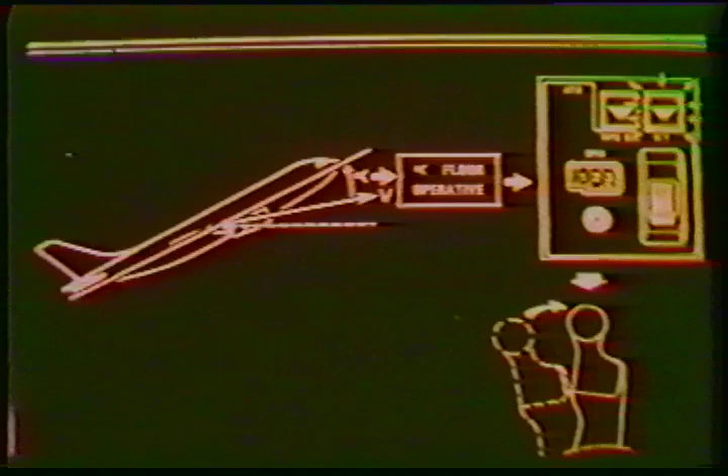The alpha floor function is automatically activated when the aircraft incurs a high angle of attack. The autothrottles will then move to the setting on the N1 computer. The operation of all the above subsystems requires AC and DC power supplies, the blue, green, and yellow hydraulic systems pressures, and the operating condition of the computers and associated systems.

The AFCS control panel is located on the glare shield above the pilot's forward and center instrument panels. Associated with the AFCS are two failure performance indicators, or FPIs. They display the various operative modes and conditions.

We will now study the action of the different controls and indicators, starting with the flight director. Flight director operation is controlled by depressing FD1 or FD2 push buttons. The selected flight director push button will illuminate. Only one flight director can be engaged at a time, except in approach or land modes.

When flight director 1 push button is pressed, the captain's flight director system is activated, and FD1 appears in his ADI. 1 also appears in the HSI. This means that NAV1 is supplied to the captain's complete flight director system. The figure 1 also appears in the first officer's ADI with the same selection.

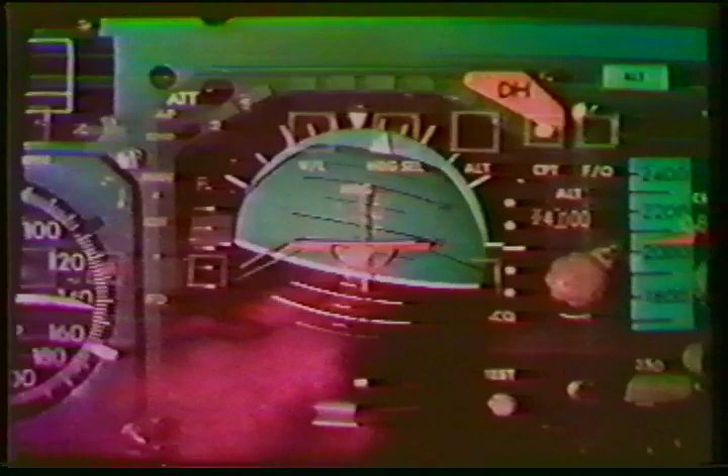The flight director roll bar will display commands to turn to the bug setting in the HSIs, which correspond to the settings on the counter. The bugs in both HSIs are set by this single counter located on the glare shield. The pilot flies the aircraft to satisfy the commands.

The roll bar will be centered when the required bank angle is achieved and will provide commands to roll out on the selected heading. The heading mode is similar to the heading mode in our other aircraft and is compatible with the pre-capture phases of the VOR, localizer, approach, and land modes.

With a VOR or localizer frequency selected on the associated nav receiver and a course selected in the course window, pressing the VL button will engage the VOR-LOC mode. When the course knob is moved, the split course arrow or course pointer in the respective HSI will move to the same figure that appears in the course window.

At VOR radial or localizer capture, VL amber changes to VL green and the heading select legend will disappear. The pilot follows the commands on the roll bar to capture the desired course once the appropriate angle of intercept has been established.

When used as an ILS, set the course arrow for the inbound front course heading, whether it is a front or back course approach that is to be flown. In this mode, an ILS approach to a runway that has no glide slope can be made with a glide slope flag in view. A reminder with respect to the course bar: it is directional. However, the roll bar in the ADI will display commands to turn to the course arrow head. Therefore, for a back course, the flight director switch should be turned off.

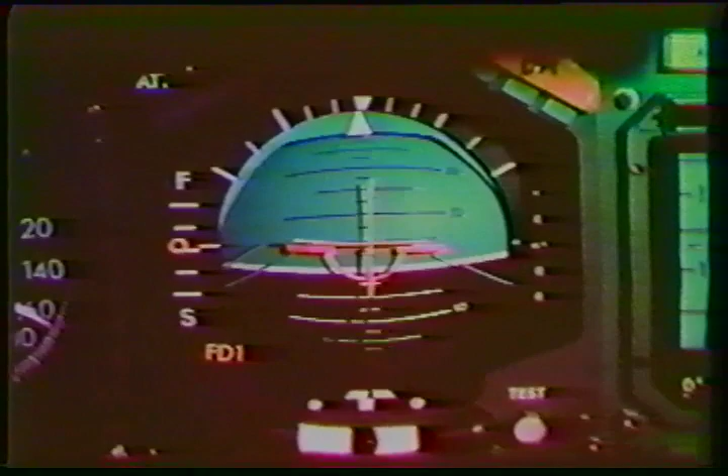The items discussed thus far, that is heading select, VOR loc, vertical speed, IAS, and approach modes, have been in relation to the flight director. The aircraft must be flown manually to satisfy the commands on the pitch and roll bars in order to achieve that which was selected. With the autopilot engaged in command, upper mode signals are now sent to the servos, and the autopilot flies these same selected commands. The pilot monitors the operation on the flight director and FPI.

The land mode is common to both pitch and roll axes. It is an autopilot command mode only and is used for auto landings. It is the only mode that allows engagement of both autopilots. The FPI will display Land 2 or Land 3 depending on whether one or two autopilots are engaged. This operation is described in the Category 3A slide tape program.

The altitude module provides control in two modes: the altitude hold mode and altitude acquire. When the altitude hold mode is engaged, the pitch bar provides commands to hold the barometric altitude at the time of engagement. In the flight director mode, the pilot must fly the aircraft to the pitch bar. The autopilot will hold the altitude when it is engaged. No counter setting is required for this mode.

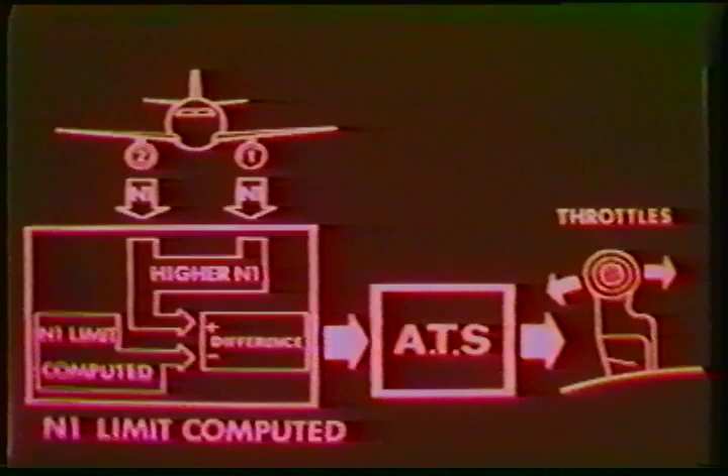When the autothrottle lever is moved to the magnetically held up position, the autothrottle computer is armed but is not supplying inputs. When the speed select, or N1, is illuminated, the autothrottles will set the thrust as necessary to acquire and hold either the selected speed or the N1 setting.

When speed select mode is engaged, aircraft speed is changed by selecting the desired speed in the counter. This also moves the bugs in the airspeed indicator. In speed select mode, if the autopilot land mode is engaged, automatic throttle closure is initiated at 20 feet.

The N1 is a full power mode used for takeoff, climb, manual overshoot, automatic go-around, and alpha floor functions. Alpha floor protection is provided when the SRS is operative, the autothrottle system is armed, and the radio altimeter is 100 feet or more, at a preset angle of attack, or when differential acceleration caused by wind shear is detected.

SRS automatically switches the autothrottle to the N1 mode. The throttles adjust to acquire and maintain the N1 RPM for the mode selected on the N1 limit computer, and the N1 flashes in both FPIs.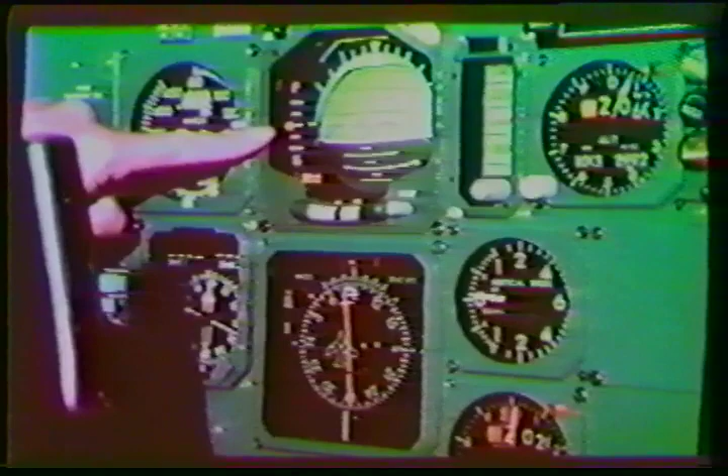Additionally, the autothrottle system provides fast-slow indication in both ADIs, which is a deviation from the selected speed set on the counter. The autothrottles do not have to be armed for this function. On takeoff or go-around, SRS pitch bar and the fast-slow indication will provide reference for V2 plus 10 with both engines operating, or V2 with an engine out. Of course, V2 is V-select, which is manually set in the counter window by the pilot.

In summary, with the autothrottle lever in the arm position and N1 selected, the autothrottle system will move the throttles to the settings selected on the N1 computer for either maximum takeoff or flex takeoff. Once the power has been obtained with a wheel spin-up of more than 60 knots, the autothrottles declutch until a climb mode is pressed. When N1 or speed select is pressed, the FPI reflects the mode by displaying either the speed select or N1 legend.

The autothrottles are disengaged by buttons on either outboard end of the throttle levers. The autothrottles are also disengaged when the interlocks are not satisfied. For example, rotating the AC Essential bus selector out of the normal position.

When indicated airspeed hold is selected, the autothrottle speed select mode is disengaged because, you'll recall, IAS is a pitch hold mode. In other words, the body angle changes in order to maintain the speed. However, in autothrottle mode, the throttle levers move to change speed. These two situations are conflicting and therefore not compatible.

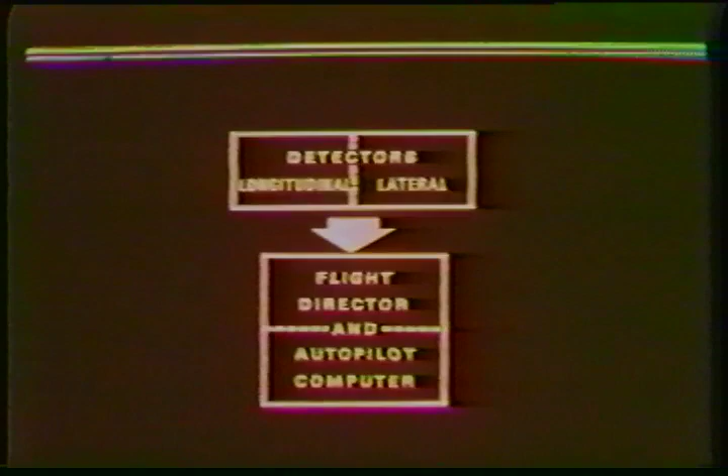The autopilot has a control wheel steering function which allows pitch and/or roll attitude changes by using control column and yoke without disconnecting the autopilot. The autopilot can be overridden during a capture phase. When the pilot moves a control column, a threshold load detector senses the load. It then transmits a signal to the autopilot computer, which changes the longitudinal attitude when the load is released. The autopilot then takes into account the new attitude and holds it. The principle is the same for the lateral axis.

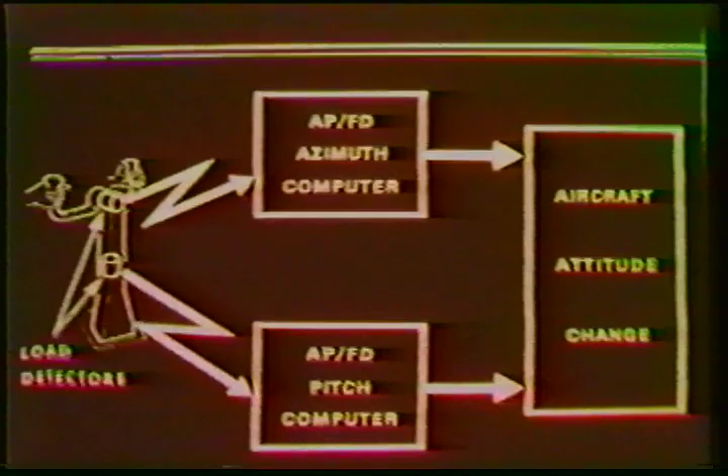With either the supervisory override function or control wheel steering, the load on the controls introduced by the pilot is detected by a load detector on each axis. These detectors transmit signals to the autopilot flight director computers, which then cause a change in lateral attitude. When the load is released, the autopilot stabilizes in the new flight path. The longitudinal attitude operates in the same manner. When a VOR or localizer capture is made late, the supervisory override function permits the pilot to modify the computed path in order to avoid an overshoot.

The autopilot can be engaged in two different modes. In manual, the autopilot only operates in the basic modes. That is to say that it holds pitch and roll attitudes. Control wheel steering is available all the time, and the associated flight director can be engaged and upper modes selected. However, in this case, the ADI bars give commands according to the mode selected, independently of the autopilot. The pilot can then follow the commands computed by the flight director by using control wheel steering.

In command, the autopilot flies the aircraft by acting on all three axes by means of information processed by the autopilot flight director computer, like a human pilot, according to the mode selected by this human pilot. When an autopilot is engaged in command, the corresponding flight director is automatically engaged. Both autopilots can only be engaged simultaneously when the land mode is selected and glide slope capture has occurred. In normal operation, the autopilot is used in command position only. Both flight directors can be engaged when either approach or land mode is selected.

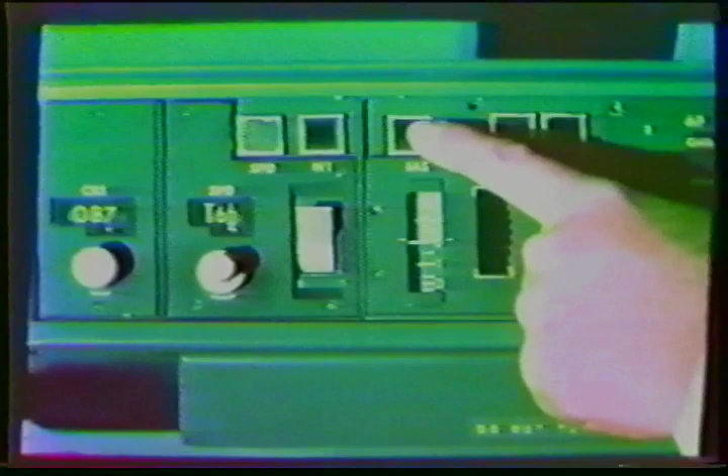MANUAL is illuminated when either autopilot is selected to manual. This is a control wheel steering or CWS mode. No upper mode can be selected for autopilot use. However, the upper modes can be used for flight director. In command position, the upper mode can be selected for autopilot use. If no upper mode is selected, the autopilot is in a CWS mode even though the lever is in the command position.

When a flight director is engaged and an upper mode is selected, the pitch bar is in view in the ADI displaying the selected commands. When the heading select push button is pressed, the roll bar appears in the ADI, and if the roll commands are satisfied, the aircraft will turn to the selected heading.

Pressing the IAS hold push button will engage indicated airspeed hold mode. The pilot flies the aircraft to satisfy the commands on the pitch bar, or if the autopilot is engaged, the airspeed that existed at the time of selection will be held.

If the altitude push button is pressed and the altitude green light is illuminated, the IAS mode will disengage, and now the autopilot will fly the aircraft to hold the altitude. With the flight director only engaged, the pilot flies the aircraft to the pitch bar to accomplish the same thing.

Altitude acquire amber light means the altitude acquire push button has been pressed to arm the system to capture a pre-selected altitude. In flight director mode, you fly the commands as displayed on the pitch bar. If the autopilot is engaged, it will capture the altitude automatically.

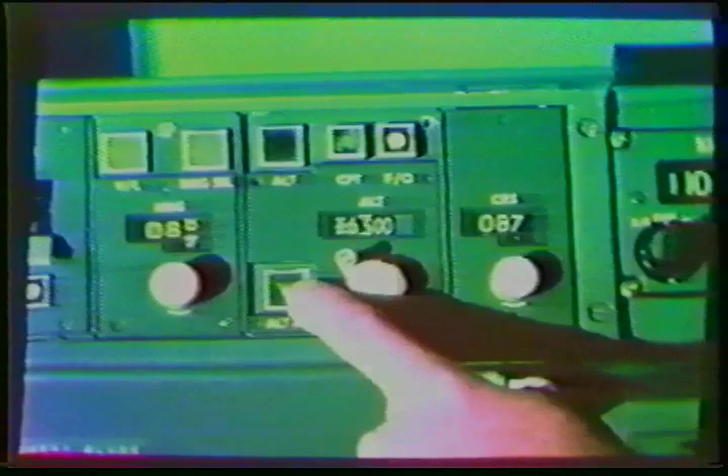Altitude acquire green is a capture phase after arming. The capture begins approximately 1/3 the rate of climb or descent before the desired altitude. At the altitude, the altitude acquire green light goes out and altitude green is illuminated.

The turbulence mode is peculiar to the autopilot only and concerns the pitch axis. As the name implies, it is used in moderate or severe turbulence.

VL and GS amber lights indicate that approach or land has been selected and the aircraft has not captured the VOR radial only or the localizer and glide slope. This is an arming phase. When the radial or localizer and glide slope is captured, the legends turn green.

The vertical speed push button is used to select the autopilot flight director vertical speed mode. The rate of climb or descent is controlled by the thumb wheel located adjacent to the push button. The rate setting is read on the indicator next to it.

Roll is an autopilot mode only. No upper mode need be selected. The autopilot will hold the bank if more than 5 degrees and pitch at the time of engagement. Roll legend is illuminated in the FPI.

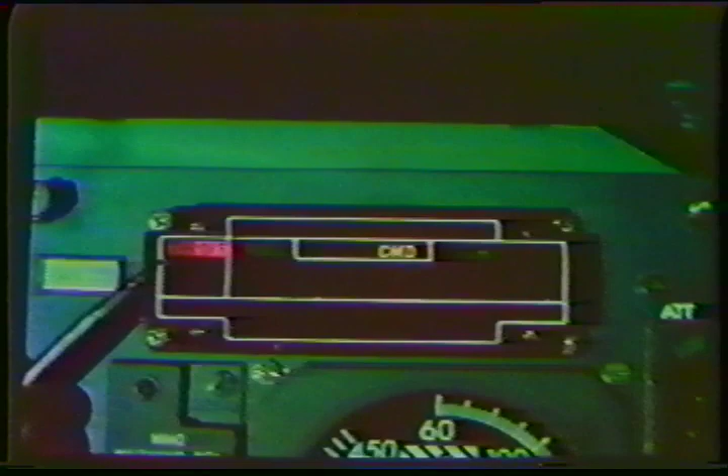The throttle off light illuminates when either N1 or speed select is tripped off. However, the auto throttle lever will remain in the arm position and the auto throttle computer is still powered. Speed select, when on, means the throttles and airspeed are controlled by selecting the speed on a counter. When N1 is illuminated, the throttle levers move to the selection on the N1 computer, for example, takeoff, climb, etc.

When land arm amber legend is illuminated, it means that land mode has been selected and one autopilot is flying the aircraft. 2 autopilots can be engaged. When land arm amber turns green at 700 feet, both autopilots are flying the aircraft with full monitoring. At this time, VL and GS green lights extinguish in the FPI.

The flare light illuminates at 50 feet, indicating that the autopilot flight director computers are in a flare and land mode. All circuits are functioning and the autopilot will flare and land the aircraft. Rollout will illuminate when the wheel spin reaches 50 knots or more. At 30 feet, the yaw pointer appears in the ADI and is the primary instrument for keeping the airplane aligned on the center line of the runway.

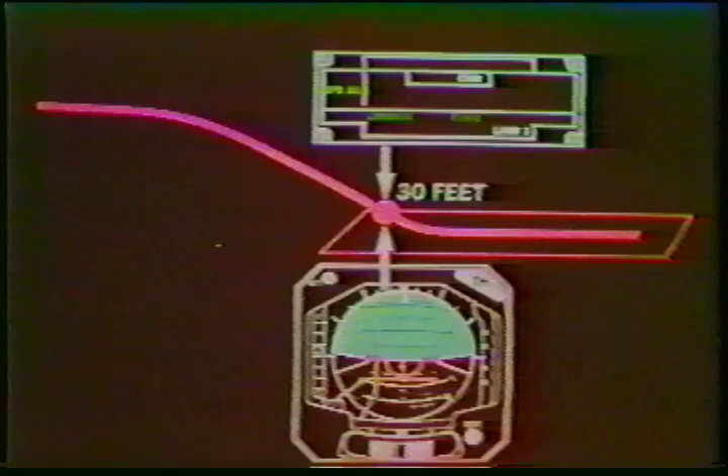Approach 1 illuminates with approach selected, 1 flight director and 1 autopilot, or 2 flight directors and 1 autopilot. Approach 2 is illuminated with only 2 flight directors engaged. Land 2 illuminates with land mode selected and 2 flight directors and 1 autopilot engaged. After glide slope capture, the second autopilot is engaged and land 3 is illuminated.

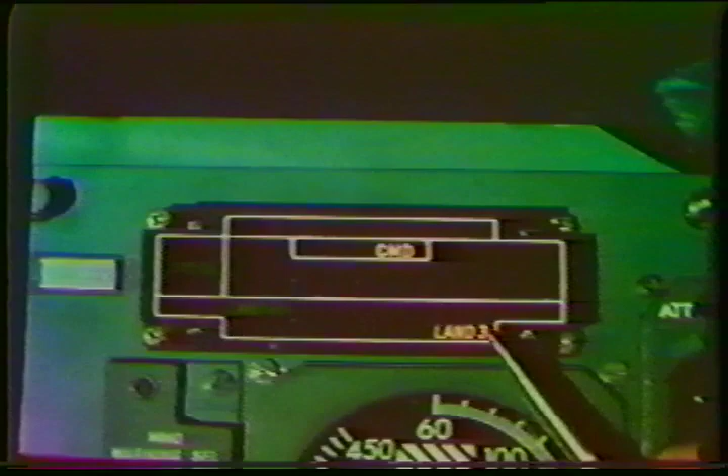The align light indicates a failure detected in the alignment circuit, or with both autopilots engaged, a discrepancy between course settings. The lights on the glare shield can be dimmed by means of a selector to the left of the auto throttle panel. The inner knob controls glare shield integral lighting at varied settings. The outer knob controls mode selection push buttons.

An operational sample. The following sample is a suggestion for the orderly use of the AFCS from takeoff to approach. The approach and landing part is discussed in the Category 3 program.

When the aircraft is ready to take the runway, the letters FHA should be the thought. F is a reminder that the appropriate flight director should be pushed on. H for selecting the runway heading on the bug and pressing the heading switch light. The letter A for setting the first assigned altitude in the window, then depressing altitude acquire push light.

If the departure heading is other than the runway heading, it may be preset in the window and the heading push button pressed after takeoff when the turn is to be made. The auto throttle system lever is positioned up and takeoff setting, either flex or max, is punched into the N1 computer. Also ensure V2 is selected in the speed window and bug set on the standby airspeed indicator.

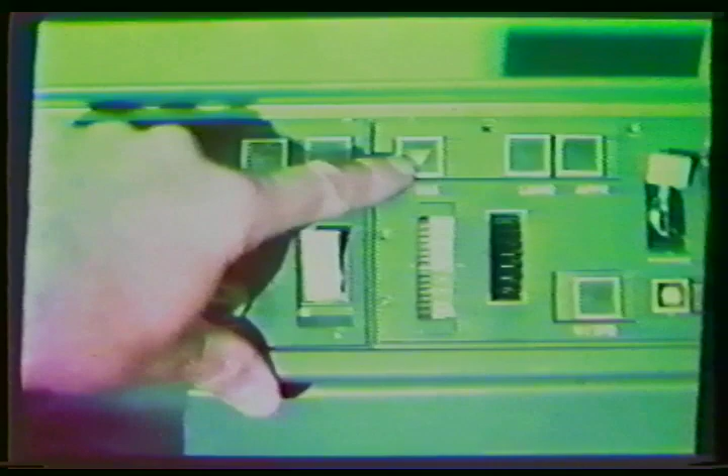When altitude acquire turns green, indicating the capture phase, the speed select counter is moved to the appropriate speed and speed select push button is pressed. This is the only time that speed select is used in climb. Speed select can be made when altitude acquire green is illuminated. It is also used in cruise within the terminal area and landing. Use IAS in descent. The approach and landing phase is explained in the Category 3A program.

This presentation identifies the airport and ground facilities, airborne systems, training requirements, and operational requirements that must be satisfied to utilize Cat 3 minimums. This information has been extracted from the FAA Advisory Circular and the A300 Flight Manual. Let's begin with definitions. A Category 3 operation is an instrument approach with no decision height limitation and with a required RVR of not less than 600 feet.

An alert height is a height above which a Category 3 approach will be discontinued and a missed approach executed if a failure occurs in one of the required redundant operational systems in the aircraft or in the ground equipment. An alert height of 100 feet has been established for the Eastern Airlines A300 aircraft. An automatic fail operational Category 3 system provides redundant operational capability using automatic systems. If one of the automatic systems fails below the alert height, the flare and touchdown may be accomplished using the remaining automatic system.

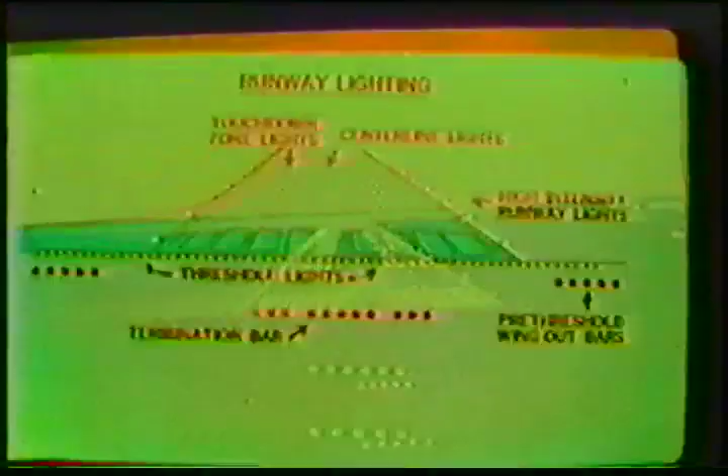According to the advisory circular, users of U.S. airports may be authorized to use minima as low as 600 RVR at designated Cat 3 airports which meet the following prescribed criteria. The ground-based system must have failure survival capabilities such that total loss of guidance will be extremely improbable. The ground ILS must meet Category 3 requirements. The approach light system requirements are the same as for Category 2 operations. Touchdown zone lights are required. Centerline lights are required with appropriate distance to go coding.

Precision instrument runway markings are required. 3 RVR transmissometers are required, unless it can be shown that 2 transmissometers can meet the operational needs for a particular airport. An issuance of a Cat 3 approach plate indicates that the existing RVR system meets the criteria.

Positive voice communication to the pilot is required to advise of sudden RVR changes. A system which provides positive control over aircraft and vehicles to ensure runway and critical ILS areas are kept sterile is required. The obstacle clearance requirements are the same as for Category 2 operations.

Simply stated, a Category 3 approach plate indicates that the particular airport meets all the requirements for a Category 3 approach. The following airborne equipment is provided in the A300 aircraft to meet Category 3 requirements. All of the required equipment listed must be operating down to the alert height of 100 feet. The required equipment is listed in the N19 section of the A300 flight manual. The provisions are as follows.

For Land 3 capability, 2 autopilots in command mode and a flight director with 2 displays. 2 autopilot off lights. Instrument failure warning system with flag warnings of instrument failure. Beam deviation warning lights and autoland lights. 2 ILS receivers. 2 radio altimeters.

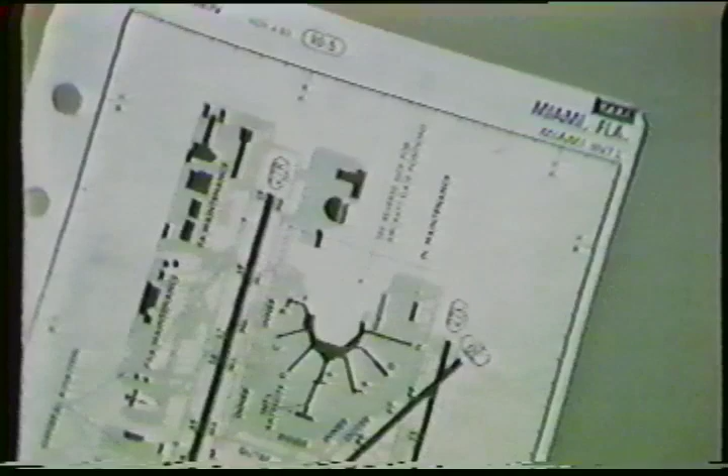The following is a typical Cat 3 approach and landing at Miami International Airport. In this situation, you are on radar vector to intercept the ILS course inbound, landing on runway 9 left. For localizer intercept, position 1 autopilot to command. Also, heading and altitude modes are engaged. The auto throttles are engaged in speed select mode with V3 plus 10 selected. Set the inbound front course in both course windows and ensure that the nav receivers are properly tuned.

As the localizer is approached on the intercept heading, land mode is selected. The FPI should display a white command legend, green speed select, heading select, altitude hold, amber VL, GS and land arm, and white land 2. It is important that the crew monitor the FPI.

The HSI displays the relative position of the course bar and glide slope. The beam deviation light should be illuminated until localizer and glide slope capture. Verify that both radio altimeters are set to the alert height of 100 feet. The ADI command bars provide visual cues to monitor autopilot operation as the aircraft intercepts the localizer course.

As the localizer bar moves to center, a green VL light replaces the amber VL, indicating capture, and the heading select light goes out. The altitude hold green light stays on until glide slope capture. The captain calls a localizer capture and selects the localizer heading in the heading select window. The ADI command bars continue to provide visual cues to monitor the autopilot as the aircraft tracks inbound on the localizer. V3 is now set in the speed select window.

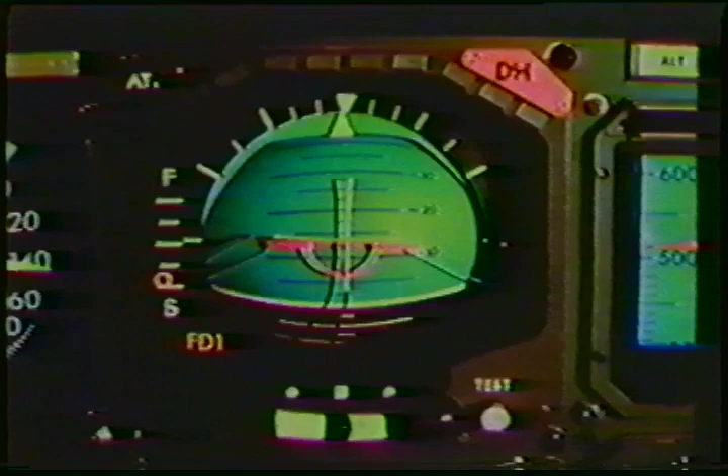The autoland lights are tested after the glide slope is captured by pressing either autoland light. The autoland lights flash and the beam deviation lights illuminate steadily. Failure of any system that was required to initiate the approach, either airborne or ground equipment, makes it mandatory that the approach be discontinued and a missed approach initiated. Furthermore, a missed approach will also be initiated if the pilot determines that an automatic landing cannot be safely accomplished within the touchdown zone. The go-around mode is an autopilot mode only.

If a missed approach is initiated with autopilots off, the flight directors disengage and the ADI pitch bar commands are supplied by SRS. With the flaps extended and at least one autopilot in command, activating either go lever engages the go-around mode. This is indicated by the appearance of go-around on both FPIs. If both autopilots were engaged in land mode and go-around is engaged above 700 feet radio altitude, the second autopilot selected will disengage. If the radio altitude were less than 700 feet, the second autopilot remains engaged during the go-around.

With the ATS armed, action on the go lever selects N1 mode for the auto throttles. The autopilots and throttles will provide a go-around N1 and adjust pitch attitude to fly an optimum go-around maneuver. The go-around mode can be canceled by disengaging the autopilots, pressing any upper mode, action on either electric trim switch, or by automatic disengagement because of an autopilot flight director equipment failure.

Loss of land 3 capability prior to reaching alert height requires a missed approach. If one of the automatic systems fails below the alert height, the flare, touchdown, and landing may be completed using the remaining automatic system. All captains and first officers must receive ground training in the operational characteristics, capabilities, and limitations of required ground facilities and airborne systems.